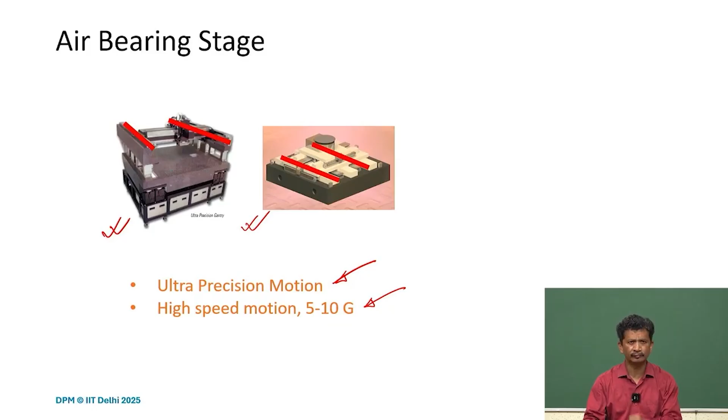So when we look at it closely, what we realize is that there is the load and stiffness plot for air bearings, and this is the air gap we are talking about. So if there is any change in the loading or any change in the air gap, we lose stiffness, and for high speed applications that may not be desired because it affects the whole dynamics. And sometimes this change can be very large: a small change in the air gap gives a huge change in the stiffness properties.

And why is that, we can easily see with this animation. So this is the granite bar. Usually we use granite for any precision application, mainly because of the structural integrity, the temperature variations, the moisture and all those aspects. The variation in the dimensions is very small, it's so rigid, and that's why in many precision applications these days you see granite blocks.

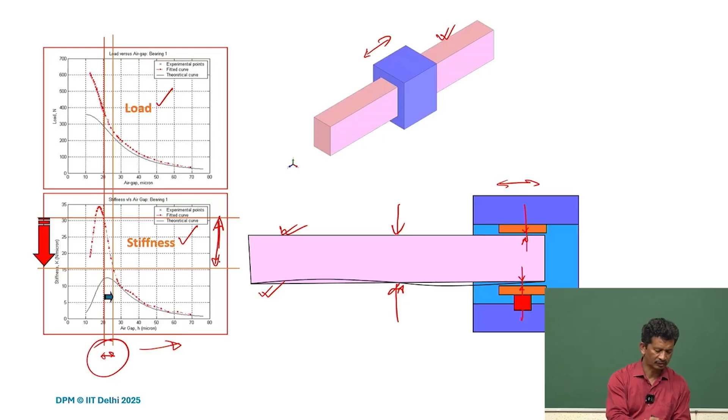And whatever residual tolerances we have are going to change these air gaps. And with any air gap change, you see that there is a huge difference in the stiffness, which is not desired. So although air bearings are very good, these are the limitations when we put them together. If we characterize and measure the modal characteristics or stiffness values, we realize there can be a huge difference, and it can be accounted for by these kinds of variations.

So yes, the parallelity is very important, how parallel the two surfaces are. I think that's something we need to understand.

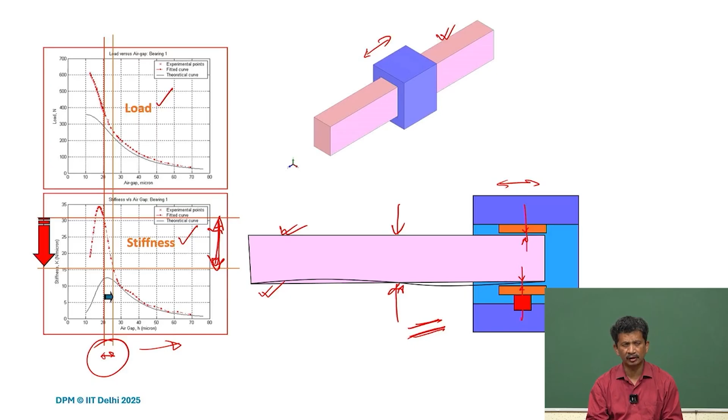So usually in most of the design there are two parallel reference surfaces, so we try to make them flat, make them straight as much as possible, and we also use them as a guide or as a reference. So there are two parallel surfaces. So how to maintain that parallelity and how to achieve that?

And if it's like two separate parts, so in this case what you see in both the examples is on two separate pieces. So during the assembly we have to ensure that they are parallel. Of course, the local deviation, the straightness will also affect, and we see the change in stiffness because of that.

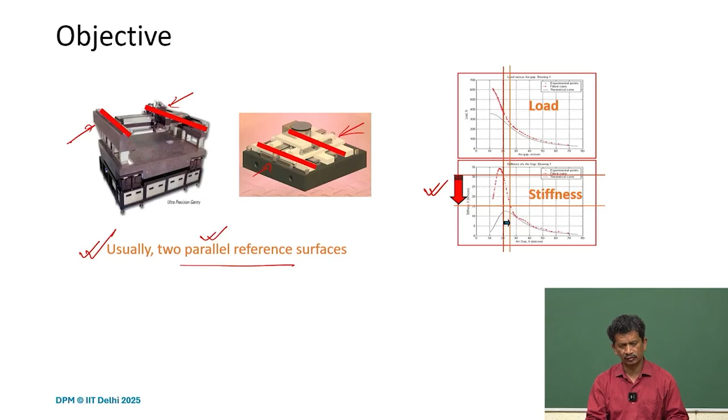In two parallel reference surfaces, what we rely on is the averaging, because it is acting from both sides, so it's preloaded, and it will come under equilibrium, so the air gap will be the same on both the sides, and that is the lateral positioning error that's possible to achieve if we are just using these two principles.

So the idea was, instead of using these two reference surfaces, is it possible to use only one reference surface? So one surface as a reference, and the other we try to manipulate, we try to adjust. So conflicting requirements are there. On one side, use only one reference surface, so we can make that surface as good as possible, the straightness, flatness, everything.

So then we follow that surface, and how do you follow? If we move along the surface, we try to maintain the same air gap throughout. So then we can mimic the reference surface, and any local error can be compensated, because if it's repeatable, then we know where and what the error is. So we can achieve repeatability. But how to achieve that air gap?

So assuming there is some kind of magic here and a block. We put the air bearing, so this is one bearing, and this is another, opposing air bearing, co-located, to get the required preloading. Behind, we put a readjustable system and try to maintain constant force. If the force is constant, from the air bearing characteristic we know the air gap will be maintained, and so we can maintain the stiffness as well. That was the logic.

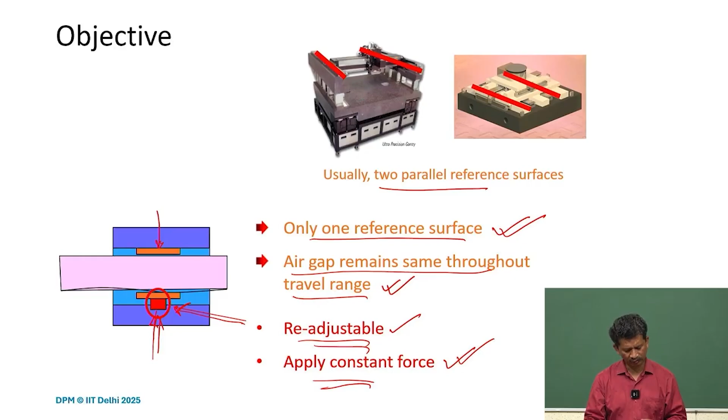And so preloading is very important. What we also learn in design is form closure and force closure. Where we try to achieve these dimensions through geometry, that is form closure. So we fix the dimensions and work towards getting tighter tolerances so that there is no deviation. So that is form closure, it's by the geometry.

Here the principle is, at the other end we are trying to develop a preload mechanism, and this is constant, so that it always applies the same preload to the air bearings, so that it closes the gap and maintains the same air gap. So form versus force closure. These are two different approaches.

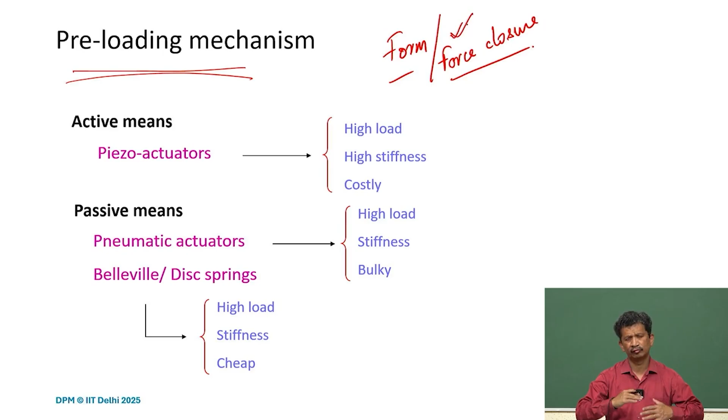So many times we use force closure. If we are not aware of it, we resort to form closure, and then we are completely dependent on the tolerances to achieve high precision. Wherever we are talking about compliant mechanisms, most likely we'll be talking about force closure. So we let it deviate, but we apply the same load. So how can we maintain the same preloading all the time as it moves?

So there can be active means. We can have actuators sitting at the back. Many of the designs have this. They have piezo actuators, and it always works in closed loop. You measure the air gap, and accordingly you change the preloading. So of course you can get a very high preloading, and you can achieve very high stiffnesses as well.

Of course, the control is one aspect. The other thing is the hardware requirement. It's complex, and at the same time it can be very costly, because you are adding additional hardware, the piezo actuators, the sensors in the lateral dimension. That will be required, and it may not be so cost effective.

So definitely, if we want to achieve very high precision and cost is not the criteria, we can always go for high end and use these kind of actuators. What if we can use passive means?

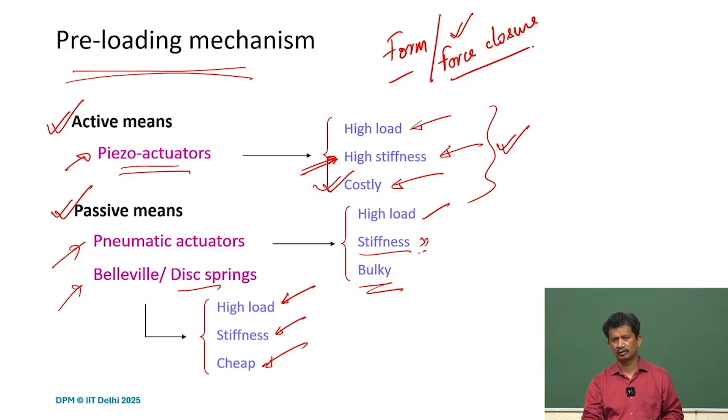So this was the philosophy, the concept that we fix the loading, preloading, so that the air gap is maintained, and therefore we can maintain the stiffness also. So now you can imagine that it is pressed with this force, and then when it slides, this is the reference surface we are talking about. So it can be flat and can have a very good straightness, and then it can follow.

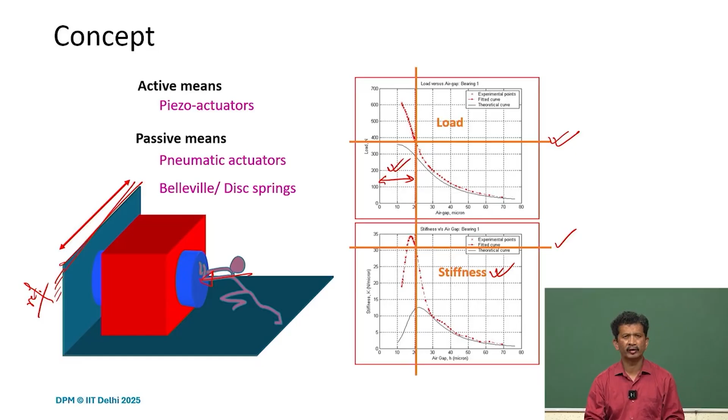And so even if the straightness is not there, if we are able to get this location wise, we know what is the air gap and what is the deviation, we can always compensate. So we tried to implement that, and what you see is the air pad here, the air bearing. So the granite block is on the top. So this black is the porous air pad through which the air is flowing out.

What we also see here is how we are supporting, that's very important. So we created a spherical joint so that it can self align. You can see the disc springs here. So we designed this adapter module, which has a way to put the disc springs, and it can be adjusted. So we have the load cell here for the measurement, and here you can see it's threaded. So if we turn, we can press it. And then the disc spring deforms, and it applies that preloading to the bearing surface.

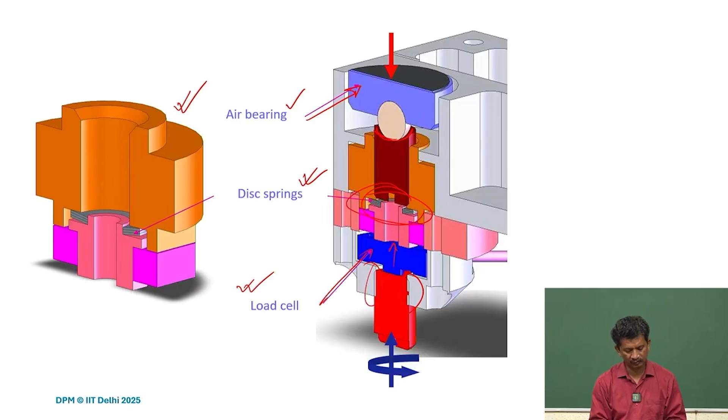So that was the idea, and this is how it's designed. So all aluminum, so lighter material, and of course we have to also look at the stiffness, because all are preloaded. So it is applying forces in the perpendicular direction, all outward. So it will bulge, and if it's open construction, the stiffness will be very low. So from a stiffness point of view, we have to also look at the design. We cannot have a very thin structure, otherwise it will bulge out.

At the same time, we cannot have a very bulky system, because then the overall weight, the payload capacity will get reduced, because this itself can be very heavy, even though it's of aluminum. So some of the features you can notice. So the bottom and top. If you see, there are three air pads here.

And coming back to the stiffness part, you can see a lot of pockets. It's mainly to reduce the weight, but at the same time you want to have a very high structural stiffness. So if there is a force, it should not deform. So a lot of pockets, and we try to remove most of the material. So 3 bearings, we know that we can support on a planar surface. So 3 is enough. So we use 3 on the top, and for preloading we use 3 of these modules. It's co-located, so directly opposite to that.

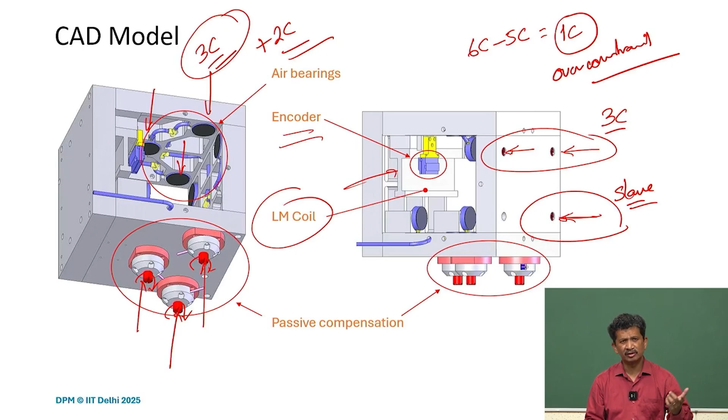And the rendering, the CAD model, you can see, it looks so beautiful, but that is not the intention. The intention is to put as many details as possible so that you know what can go wrong, and if there is any iota of doubt in putting anything there, it means something is missing, some clarity is not there. So many times as an engineer, you say, oh, we can do that, we can take care of those things later. But you realize that actually that is something missing, and that is going to give big headache, big problem when you are really going to integrate and do the testing, because that's something not clear to you at that moment. How will it be better later? It can't be. So therefore, it's very important, that clarity, that visualization, the 3D visualization we generally talk about.

So even in engineering, what we talk about in the first year, we talk about the visualization. Many people misinterpret it, and many times you simply think about the drawings and just making the CADs. But it's more than that, it's more about the visualization, getting that clarity in your mind. And for an artisan, for an artist, for an engineer, it's very important to have the concept, have that 3D perception of what you want to build.

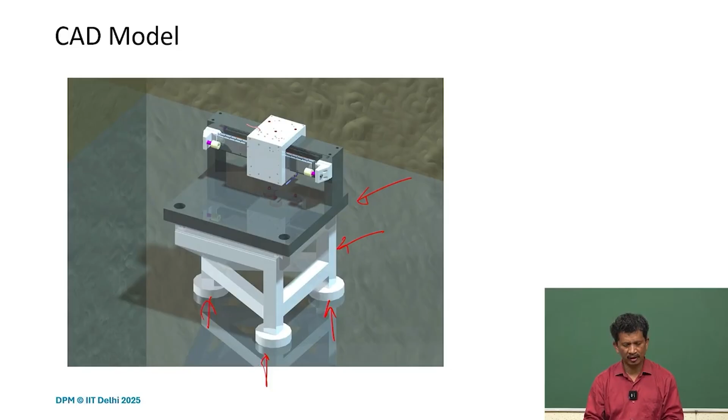So once it comes to realization and fabrication, yes, we need to have a very good support, and it's not only the design but the execution part, getting those individual parts to the tolerances mentioned. That's very important. And yes, workmanship and a team working on these kind of things is very important. So good thing was, once it's a design, I can just give the part drawings to the manufacturer, they can come up with all these parts in time with very good tolerances. So it was very easy to work with.

So you can see yourself how things can be done on the shop floor. So it's slow, one by one you put them together. These are air pads and the pneumatic tubes you can see. So slowly you put them together. You also assemble these bearings. Sometimes you also have to be a little bit creative and resourceful. Sometimes some parts may not exist, so you may have to use some other parts differently. And some kind of glue, adhesives we also used. So I don't see any difference from the CAD to this, because everything is there now.

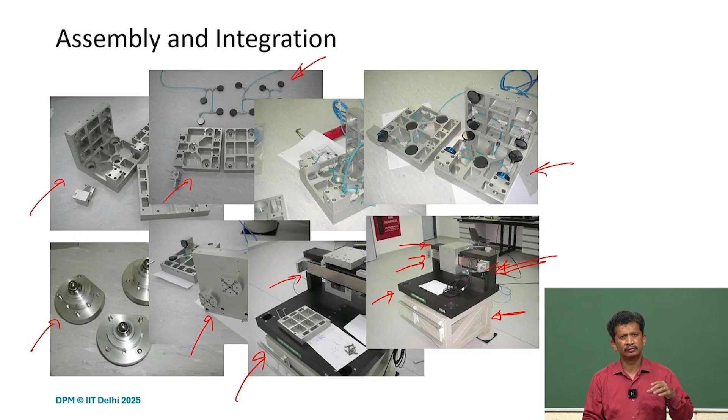So I think this is the time we should also take it up, and if this kind of development we start doing in India, definitely we can support the industries who need these kind of systems. So that is one requirement.

The other requirement is, of course, we need to characterize, we need to measure, and we should be able to measure to that level. So these days, the micron is already a big number, so it should be sub-micron level kind of measurement we want to do. We want to do the repeatability, how repeatable it can be. So interferometers are there. These are older ones, but these days very small versions are available, and they can be easily plugged in, and no need to use this very big setup these days.

So this can be easily implemented in ASML machines or even other machines. We didn't talk about the metrology frame, but there is also a metrology frame where we put the sensors and different kinds of sensors and optics, so that any kind of machine dynamics should not affect the measurement. So measurement should have a different metrology frame.

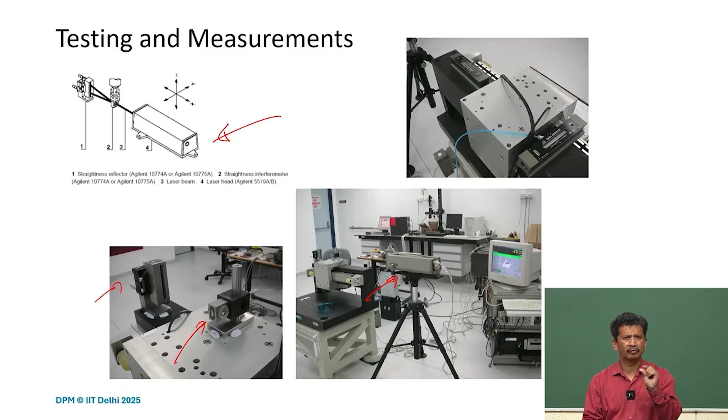But coming to the instrumentation part and the characterization part, this is required if we want to develop any kind of system, and a lot of optics are involved here. So we put it there, and then we can also place it and do the measurement. These are the bare minimum, things which will be required: different kinds of flats, different kinds of leveling tools, interferometers, and if you are going for a dynamic application, even piezo actuators and different kinds of sensors, capacitive sensors, inductive sensors, which work in the micron range.

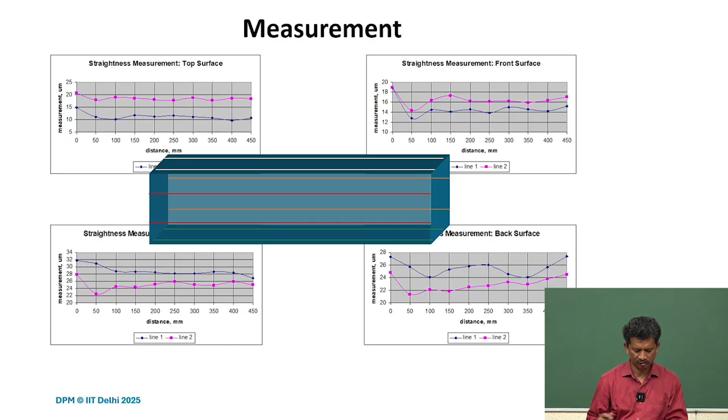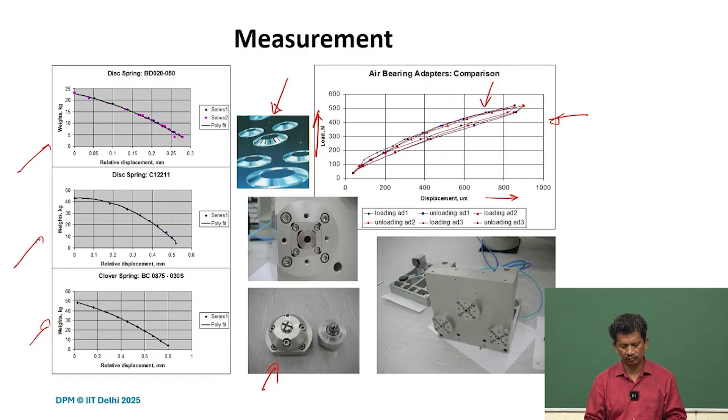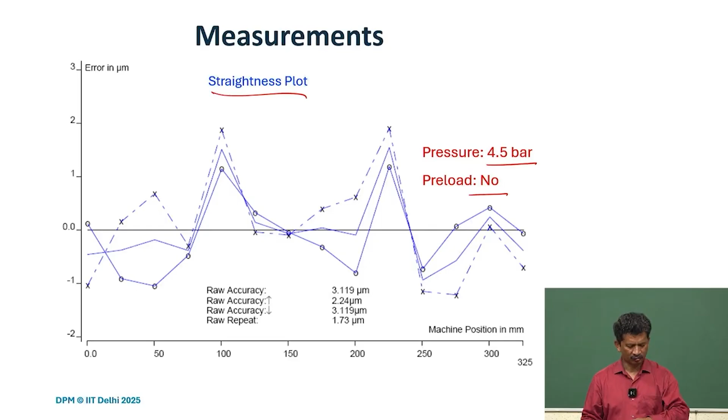We also did measurements, made the straightness plot, and applied different pressures. We wanted to study that as well, and also the loading. Minimal loading, no preloading, means there is no preloading from the bottom end with the screw, but of course there was preloading because of its own weight. There was no extra preloading added, and this was the measurement at different locations. We stopped at one point, measured along that length, and moved, and that's what we are getting. Similarly, we increased the preloading by tightening this screw to a moderate level.

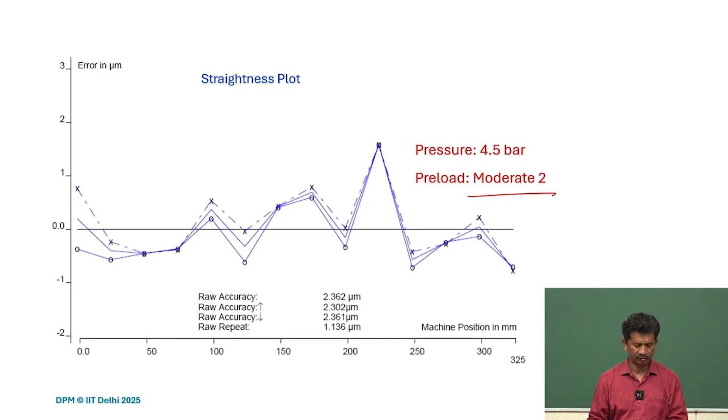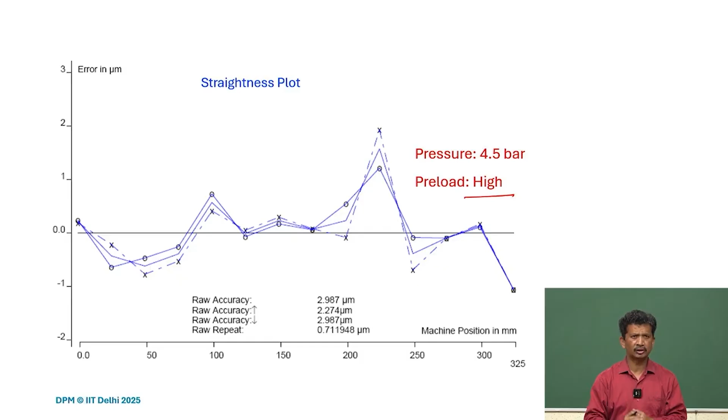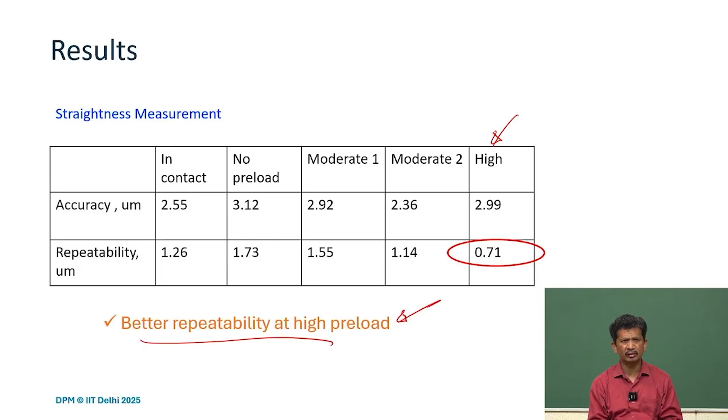As we increase the preloading, you can see it is now converging to a particular location and not changing much. So what we realized is that if the preloading is high, the air gap is reduced, and that also leads to better repeatability, which we also observed here. So better repeatability at higher preload. Higher preload is very important.

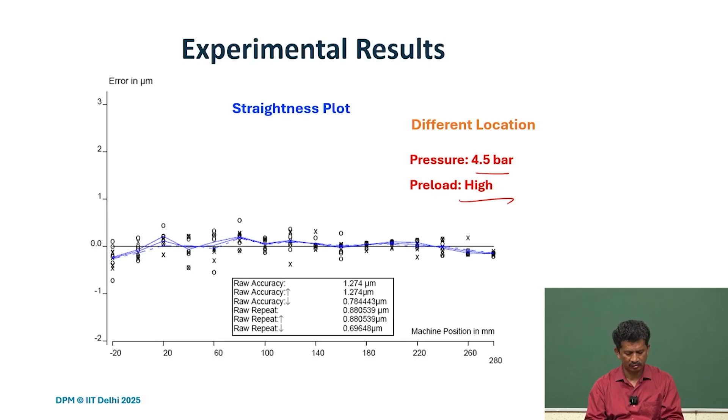We did another one again at a different location. We changed the preloading, and those are the measurements you see as we moved around. And again we changed the loading, the preloading. The pressure is usually 4.5 to 5 bar. We tried to increase it, but then we encountered pneumatic hammer, so one has to be careful. Of course, there are certain things we don't have an answer for now, but while working, maybe we can look at the literature and correlate the data.

Also, although the porous air bearing manufacturers claim that it's immune to pneumatic hammer, in practice, when you start building the system, you encounter the pneumatic hammer even in those cases. So you have to always take those words from the manufacturer or the catalog with a pinch of salt, and you know the problems only when you start building things using those modules.

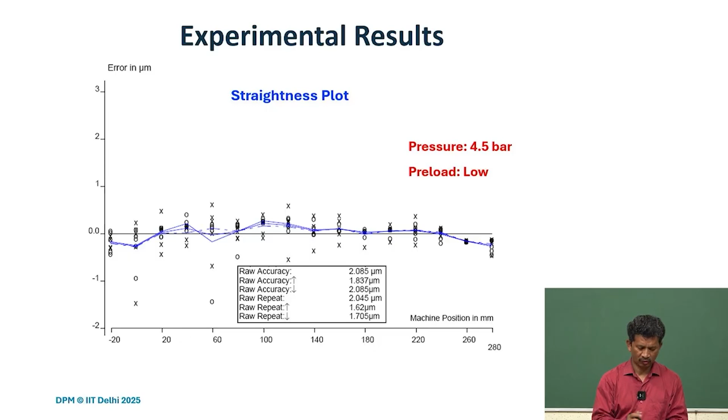So if it's low, you can see the variations, and when we try to put them together, we realize that if the preloading is high, the repeatability is of the order of 0.88 micron. And one way to see it is it's supported at these 3 points, and it's gliding. So at the individual level, you have a different measurement, 1 and 2, but if you take any measurement at any point, it will always be an average of the 3. So it cannot be more than the 3 if it lies within that boundary, within that triangle.

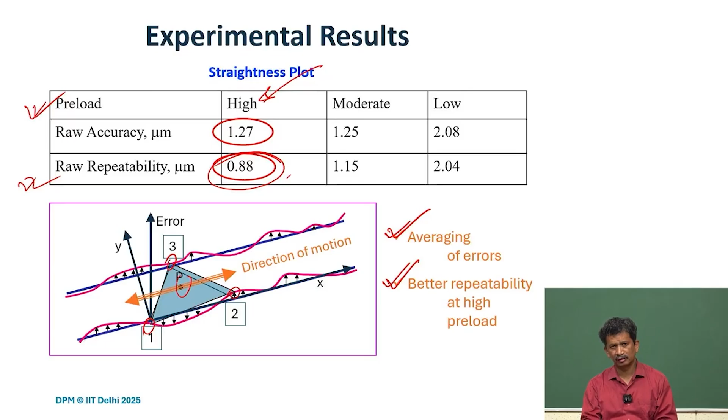Of course, if it's over, then it will get accentuated and the error will be larger. But we'll get a very good averaging. So averaging of errors we'll find, and better repeatability at high preload. So preloading is one of the things I think we have to always look into.

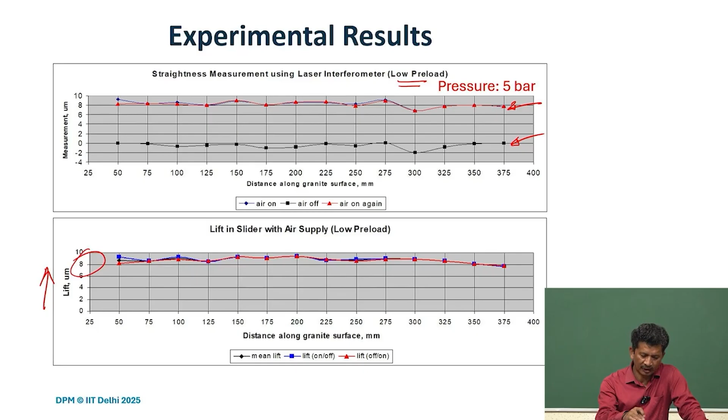What we also realize is, at low preload, we try to measure when the pressure was not on, so it was sitting on the surface, and then we apply the pressure, and the entire thing gets lifted up. From the first plot itself, you can see that it's mimicking the surface. But when you plot just the lift, you realize that it is of the order of 8 to 9 micron at low preload. When we increase the preloading, that has reduced to 2 to 3 micron.

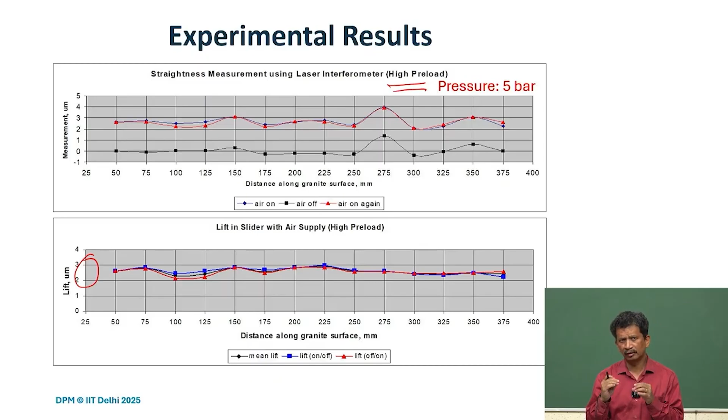So now you can imagine what the air gap is, what the dimensions are where you are working. It's not like those machines, hovercrafts, where the gap is in centimeters or so. Here, the lift, the gap you are talking about is of the order of 3 micron. So the preloading is very good for repeatability, but the air gap now is of the order of 2 to 3 microns. And if that is the gap, then what is the flatness requirement of any surface? Because things can easily get stuck.

So the flatness requirement, the surface quality of the granite block, is very high. It has to be within microns, and not just within microns, but maybe of the order of 0.2 micron. Can you achieve that? That is a challenge. So if we want to develop systems made in India, we have to check, if we are getting granite blocks from Rajasthan or whoever is the supplier in India, how to get that? What kind of requirement is there?

What are the processes? Moore Lab in the US and Cranfield in Europe have mastered the art and they have this huge system. We need to understand the limitations of machine learning and AI. They cannot make these flatter surfaces, but these flatter surfaces are required if you want to do more and more AI. So we have to think about this cycle: AI needs chips, but the chips need these tools. And these tools are many times handmade by the mechanical engineers, the electrical engineers, the core engineers.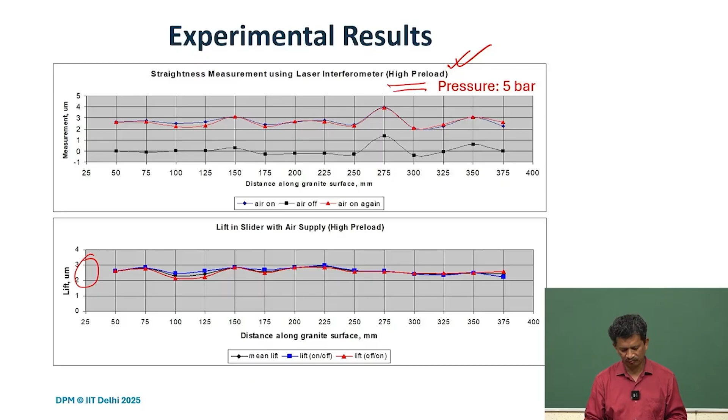Now looking at the high speed, we tested for 2g, that is 2 into 9.8 meter per second square. This is the acceleration; g means 9.8. But these days we are talking about 10, 20, 30 g acceleration, wanting to move very fast.

And if that is the requirement, how can we mitigate the problems, the vibration problems? How should the machine be so that the vibration does not get transferred to the other machines? That is a big challenge, and one has to understand that.

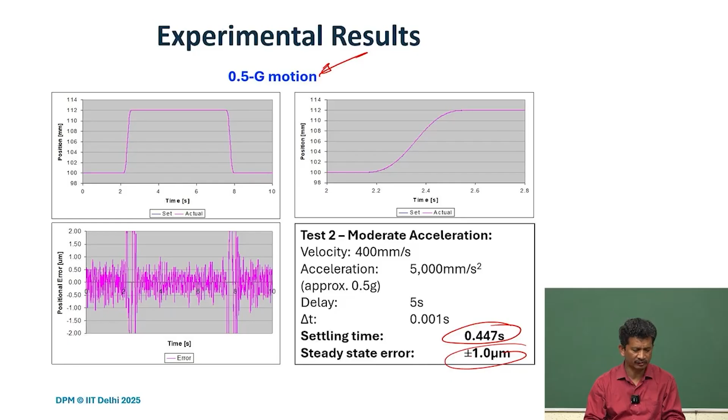I think these kinds of problems, these kinds of projects expose us and let us learn a lot of things about the state of the art, about the systems we want to build. And of course, many of the things can simply be spun off, and we can have different products for different applications. One can start gently and develop a system. So maybe one axis, then one can go for 2-axis systems, and then one can embed the third axis.

And many of these diamond turning machines, and even the machine tools, need that, not only for production or for inspections, but even the high-end measurement systems, SEM, and even CMM machines. So it's there, and once we are exposed to the technology, and it's not taught everywhere in India, I think this is the time we should start focusing on and learning about these tools, because this is what makes the modern machines.

And these machines are required not only for achieving higher precision or just out of fancy, but also to support the various initiatives we have, and to support the industry which is coming now, the semicon industry, the electronic industry, and even our research labs, ISRO, DAE, DRDO. They need all these advanced tools and systems, and unless we start building them, it's very difficult to support them locally. Of course, things can be bought from abroad, but we have to pay a lot of money and it can be very costly.

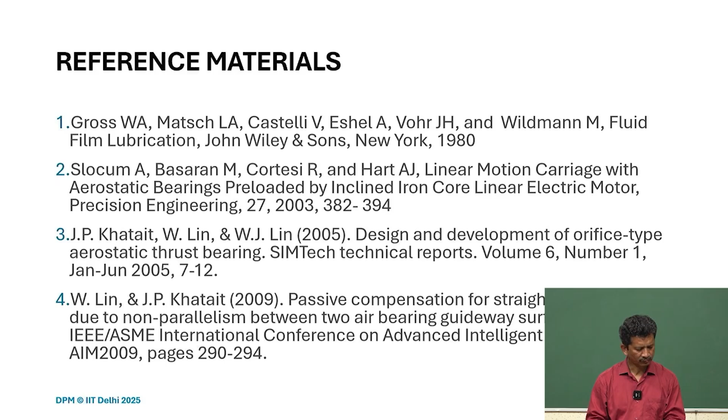So to start with, we can always leverage what we have been discussing in this course and work on projects or products. Just to give more insight, you can always refer to these two articles, easily available. Whatever I presented today and in the previous class is from these two. It's already in the public domain.

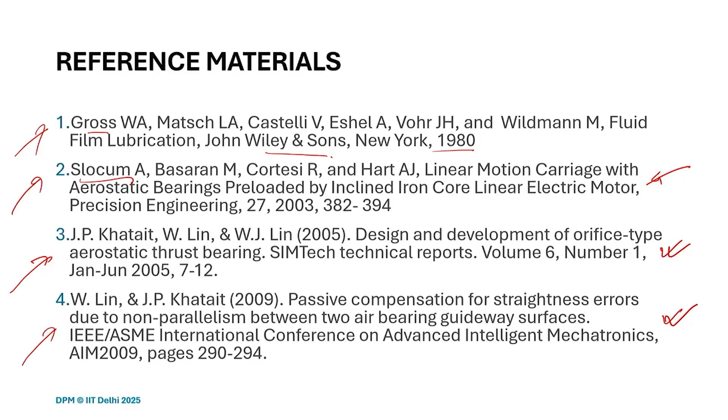A lot of work by Professor Slocum in precision machine design you can find. And if you want to know more about air bearings, there is a lot of material by Gross. Unfortunately, many times these books are not available these days, but if you search enough, you may be able to find them. So these are the reference materials you can always look at.

There's a lot of material on the internet, and a lot of companies working: New Way Bearings, Aerotech, Rockwell Automation, Newport, Dover Instruments. So many leading companies and a lot of literature. One can always look at that literature and those reference materials.

So we covered air bearings and guideways, and we also talked about some case studies, some developments I worked on previously. Now we'll move to the next topics, and we'll talk about dynamics and different kinds of actuators, and we'll take up more examples.